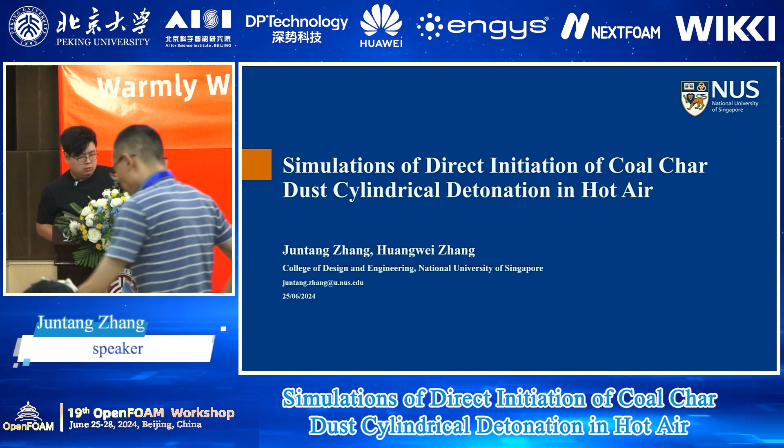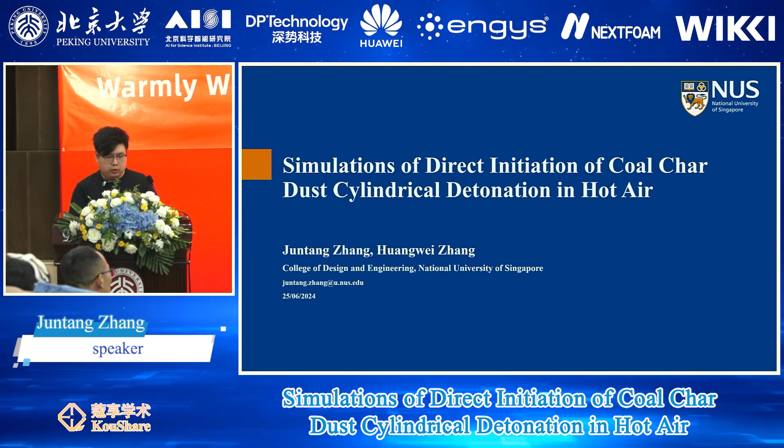The topic for my report is simulation of direct initiation of coal char dust cylindrical detonation in hot air. The content includes the research background, the mathematical model, results and discussion, and finally the conclusion. The first part is the research background.

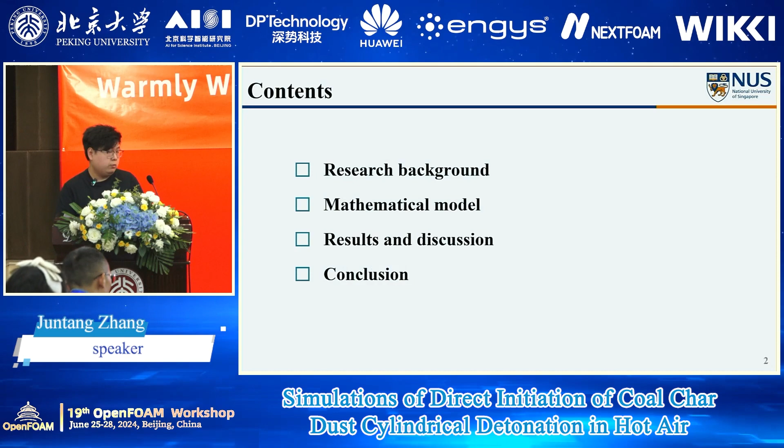The incorporation of coal char dust into the propulsion system has attracted a lot of attention, such as in rotating detonation engines (RDEs). The addition of coal char dust significantly enhances the fuel detonability and propulsion pressures, thus facilitating detonative combustion in the propulsion system.

Moreover, coal char dust has a high energy density. It's easier to store and presents almost no corrosive or cryogenic problems.

Except for the application in the propulsion system, the safety hazard corresponding to coal mining explosions also needs to be paid attention to. Coal particle explosions generate flames, shock waves, toxic gases, and high temperature, high pressure environments, posing serious threats to personnel and equipment safety. Therefore, to better control and prevent coal dust combustion, explosion, and detonation, we must study key mechanisms like flame propagation and detonation wave evolution.

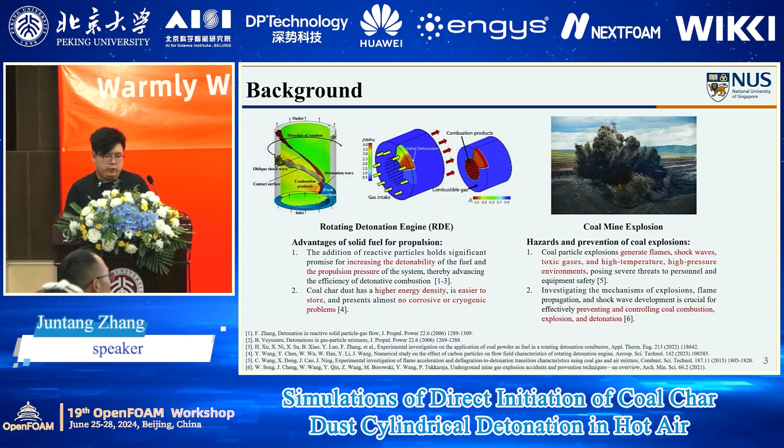However, there are relatively few studies on the direct detonation of coal char dust. In experiments, the peak value at monitoring points 1-8 proved the existence of coal particle detonation. Through multi-dimensional research under two different diameters, the pressure can reach 40 and 46 times the initial pressure, and the pressure peak is very stable, proving the occurrence of stable detonation conditions.

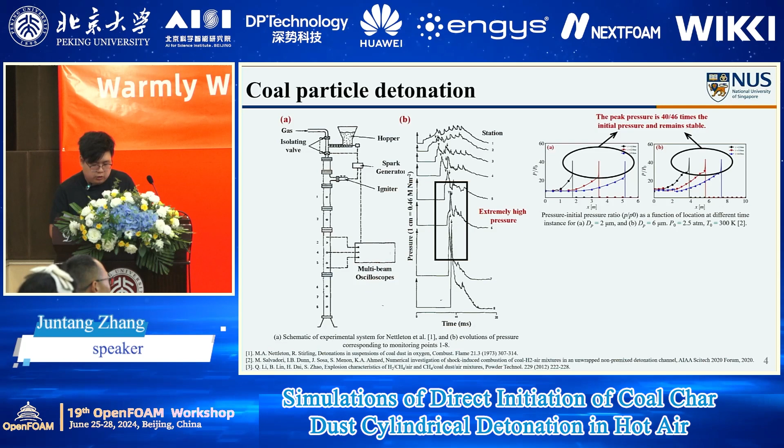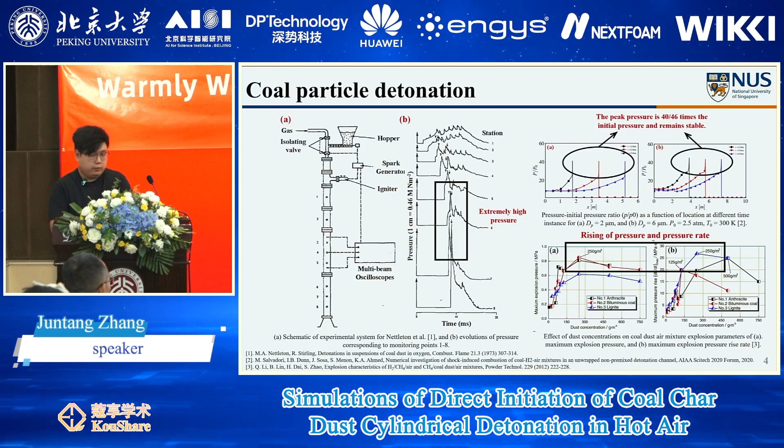Moreover, the addition of coal particles will increase the explosion pressure and the pressure growth rate. However, these works did not conduct detailed studies on the evolution process of coal char particle detonation and propagation.

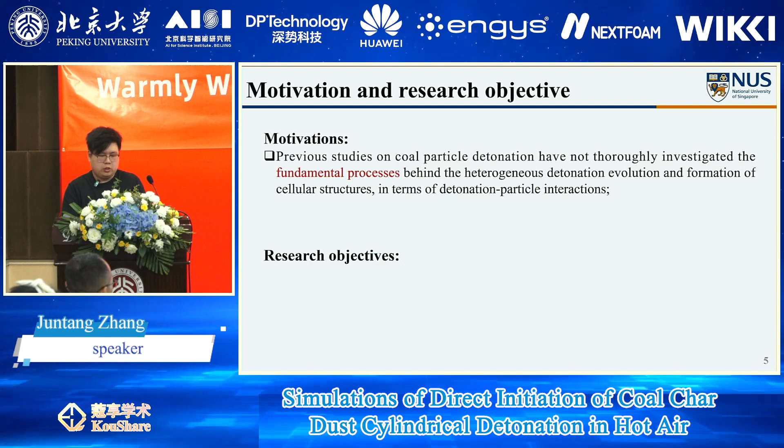Based on previous research and real-world observations, I will outline the motivation and research objectives. First, previous studies on coal particle detonation have not thoroughly investigated the fundamental process underlying the evolution and formation of the cellular structure. Besides, research on coal char particle detonation ignores the effects of global particle concentrations.

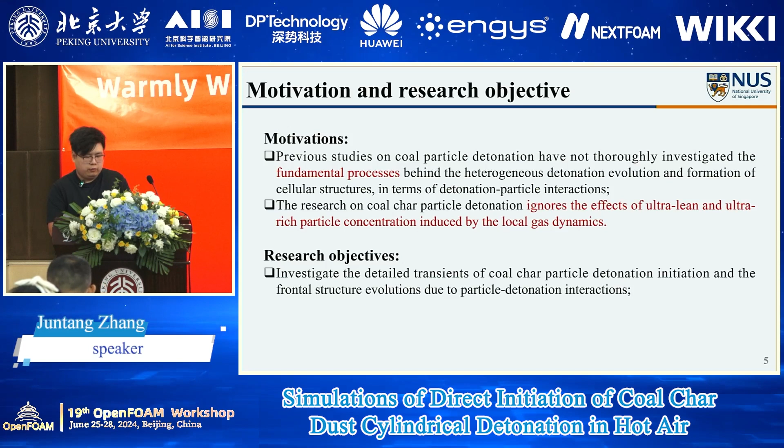Therefore, corresponding to the motivation, we need to study the detailed transients of coal char particle detonation initiation and the evolution of the frontal structure due to particle detonation interactions. Also, we should explore the development and characteristics of quasi-detonation waves with excessive coal char particles.

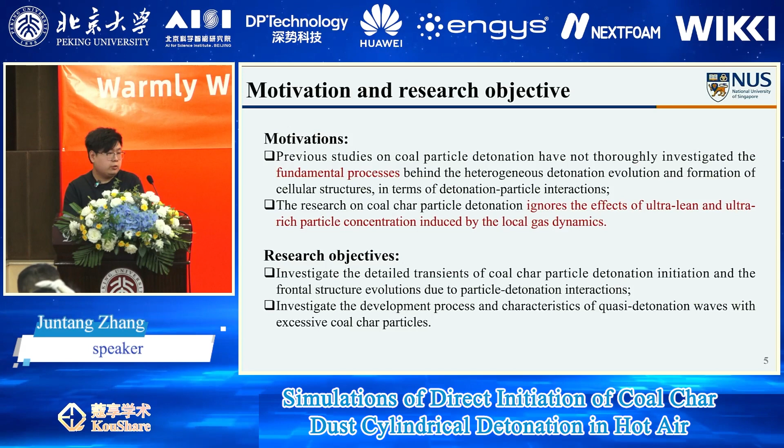Next, I will introduce the mathematical model for the whole simulation. The numerical simulation is completed by an OpenFOAM-based solver, using the Eulerian-Lagrangian method. The reference shown here demonstrates the effectiveness of the solver. The slide also shows the governing equations for the gas and solid phases, the particle surface reaction formula, and the interface source terms. The continuous phase is calculated with the Eulerian method, while the particle phase equations are solved with the Lagrangian method.

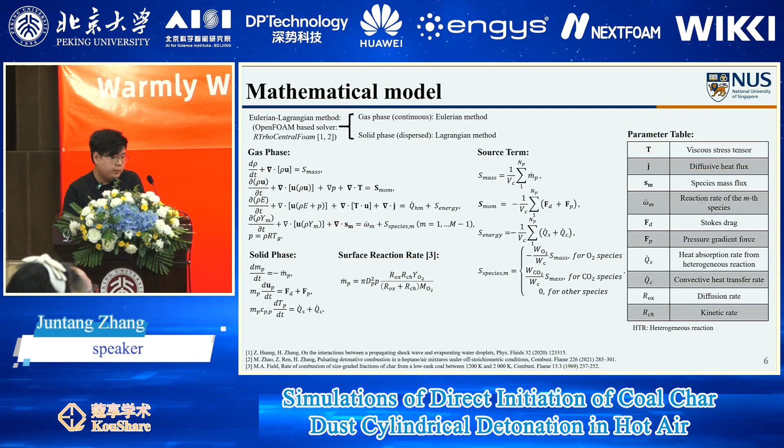Corresponding to the simplification process, we need to further simplify the governing equations. First, we ignore particle collisions in the dilute flows. Additionally, a low Biot number indicates uniform temperature inside the particles. Besides, compared to the inertial force from shock waves, the gravity of the particle is too weak to consider.

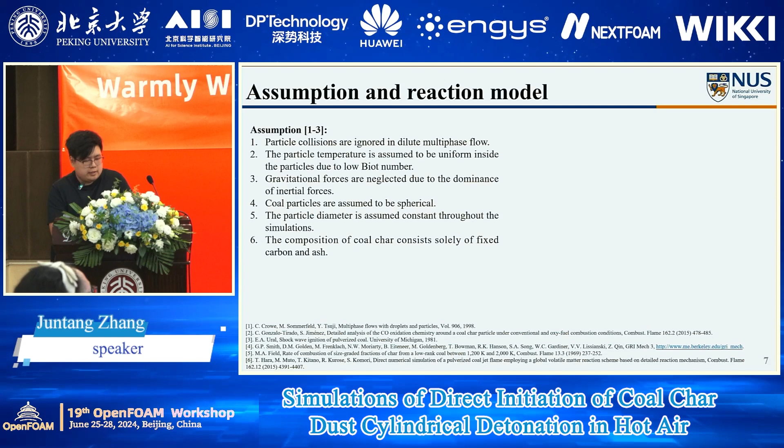We also assume that the coal particles are spherical, and given the faster propagation speed of the wavefront and the longer relaxation times of particle reactions, we can ignore the effect of particle volume variations in the wavefront and assume constant particle diameters throughout all simulations. In analyzing the coal char particles, we focus on the fixed carbon and ash only, ignoring other components like the volatiles. Here are all the assumptions.

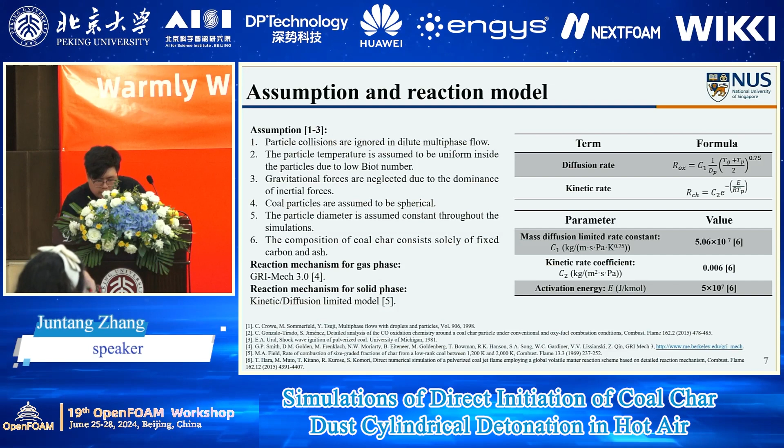In the computations, although there is no gas phase viscosity, the gas phase reactions are still important. For the gas phase reactions, we utilize GRI-Mech 3.0 to simulate the gas reactions, and the kinetic diffusion-limited model is applied for the particle surface reactions. This formula and the parameters are displayed in the table here.

Here we make model validations for our simulations. We utilized a 6.75 one-dimensional domain to mimic the referenced experiment, to validate our model and our parameters. The initiation radius of the blast wave is set at 0.31 meters, shown here as the red parts, where the gas temperature T, pressure P, and the speed of the blast wave all satisfy the Taylor-von Neumann-Sedov blast wave solution.

The coal char particles are uniformly distributed beyond the blast wave, with the initial parameters detailed in the table.

We can see the black dots. Here we introduce a concept of a parcel, wherein it's assumed that all particles within the same parcel share the identical properties, such as the temperature and velocity, to simplify the simulations. Among them, the parcel resolutions, as shown in the table, represent the spacing between the parcels.

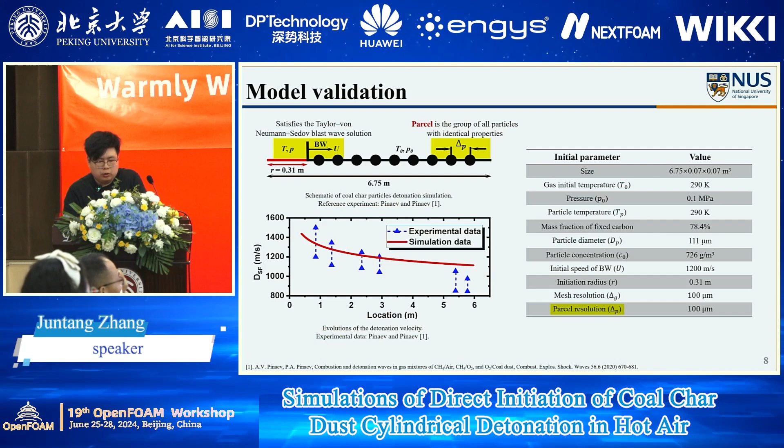We can see the figure. The results illustrated in this figure demonstrate that the model can reasonably and quantitatively predict the detonation velocity of the coal char particles. And now I would like to introduce the schematic of our detonation simulation.

The simulation domain measures 0.2 meters in both length and width, which is filled with air. We initialized a cylindrical blast wave at the red spot to ignite the detonation wave. The particle parcels are uniformly arranged outside the blast wave, and the concentration of these parcels ranges from 12 to 1,240 grams per cubic meter, corresponding to a particle equivalence ratio from 0.2 to 20.

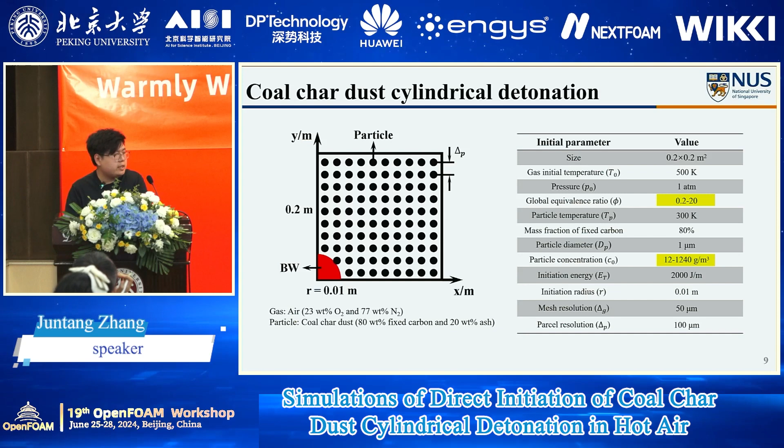Additional parameters are detailed in the table. So here we must focus on the 20 equivalence ratio. It's a very high equivalence ratio because we found that the concentration effect has a very significant effect on the detonation propagation. And here I would like to discuss the sensitivity analysis of the mesh.

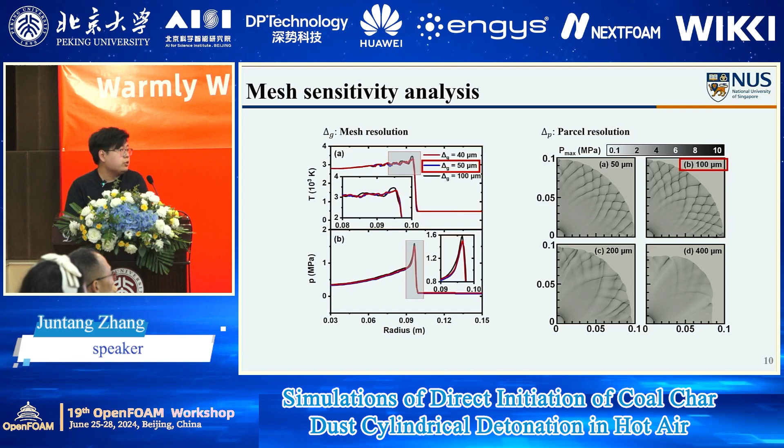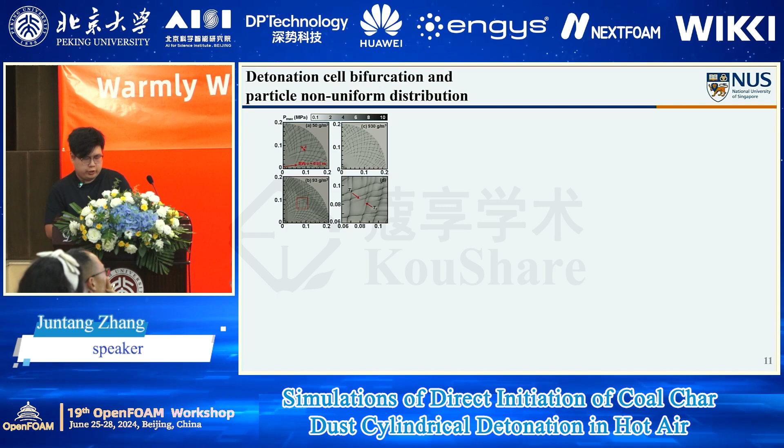Okay, and the coal detonation leads to the cell bifurcation driven by the solid particles. We began to examine the peak pressure trajectories across the three particle concentrations. In all cases, the overdriven detonation occurs at the early stages.

Beyond a critical radius, frontal instability starts, marked by the formation of clear peak pressure traces. Additionally, with a particle concentration of 93 grams per cubic meter, the cell becomes finer than in figure A at 50.

Because the sufficient heterogeneous reaction energy release stabilizes the detonation. However, at a particle concentration of 930 grams per cubic meter, the cellular structure becomes less distinct due to the excessive particles absorbing more energy from the detonation waves.

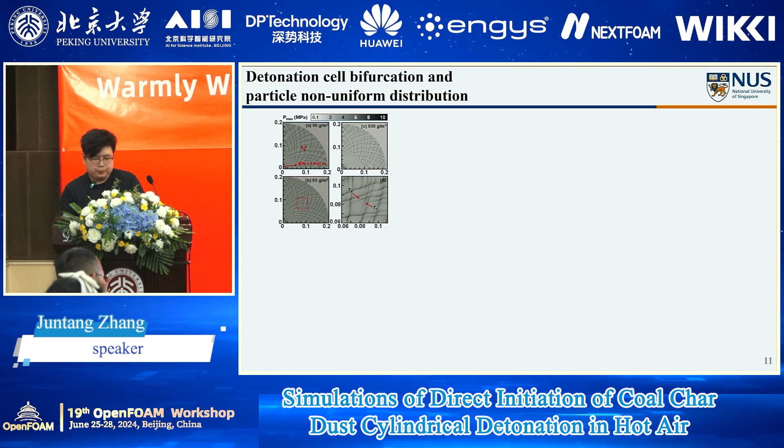And moreover, the detonation cellular bifurcation happens when the frontier radius is large, resulting in the formation of secondary cells and transverse waves from the triple points. This can be observed in the enlargement where the trajectories T1 and T2 gradually darken. The evolution of the triple point is displayed here.

And here we provide a GIF to show the evolution of the wrinkles and the collisions. The profile indicates that the particle aggregation and the surface reactions promote new transverse wave generations.

And this GIF also shows the evolution. The GIF also shows the evolution of the wrinkles and the collisions. And here we just provide the particle aggregation and the sparse areas.

Using the enlargement as an example, the two shear layers, S1 and S2, extend from the upper and lower triple points and behind the Mach stems. Specifically, sparse particle regions are filled with vortices from the transverse layers, which displace the particles from the original positions.

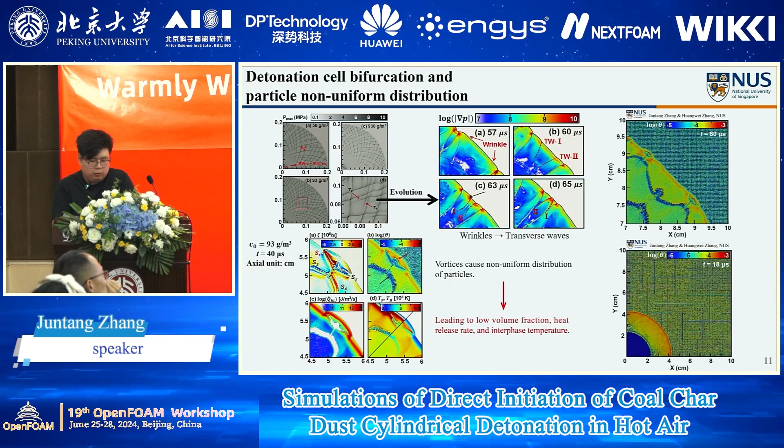These regions are characterized by low heat release rate, indicating relatively low local particle burning intensities and resulting in lower particle and gas temperatures.

Here we also provide an evolution GIF of the continuous layer sparse particle regions due to the variations within and between the Mach stems. And here we can see the evolutions of the sparseness regions and aggregation regions.

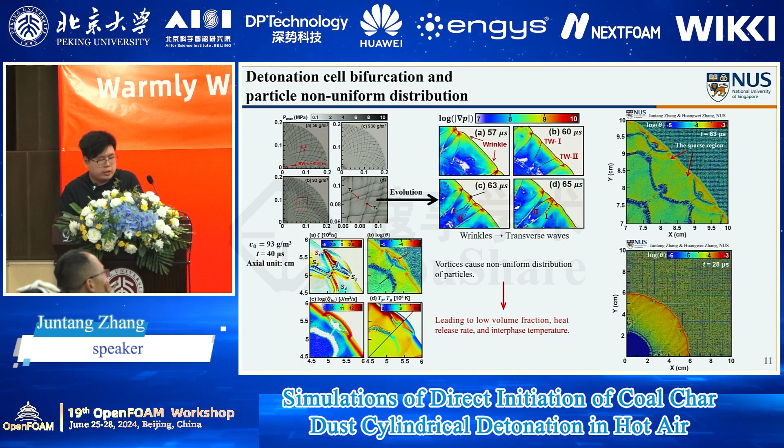Okay, and here in this article, we introduce the dimensionless parameter ξ, representing the mass ratio of the coal to the oxygen. To demonstrate the variations in the average cell size and the shock wavefront velocity, the ξ is related to the particle concentrations.

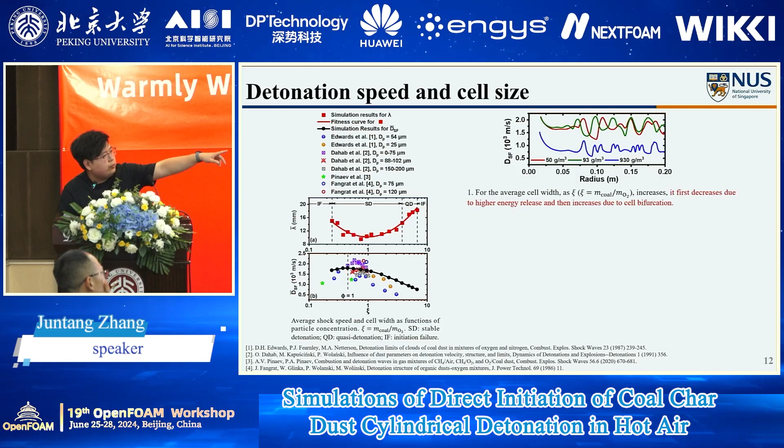So here for the first figure, the left figure A, the red line, we can see initially the average cell size decreases, indicating that more coal leads to a greater energy release and a smaller cell size. However, subsequent increases occur due to the cell bifurcation.

As the ξ increases, the average shock speed of the stable cellular detonation initially rises and then decreases, aligning with various experimental results.

From the ξ and the corresponding ratios between the particle concentrations, we can also categorize the detonation types based on ξ.

We will explain the specific reason for this classification later, such as the stable detonation or the quasi-detonation cases. Regarding the detonation speed under different concentrations from the figure on top, we can see the shock speed decrease rapidly beyond the initial blast wave locations to exit from the overdriving conditions, marked by the initiation of speed oscillations due to the multi-headed front.

In the quasi-detonation cases, we can see the blue lines. Here, the shock speed is about 48% lower than in the other two cases.

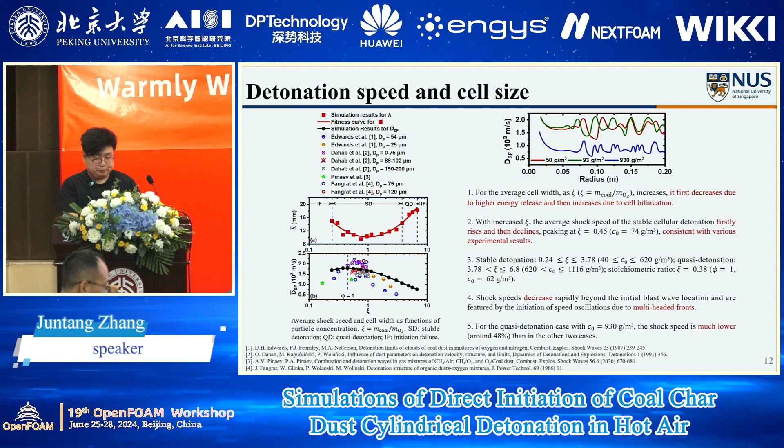In the previous pages, we distinguished the concentration ranges of the stable detonation and the quasi-detonations. Here we make comparisons. We can find that...

The phi here, and the phi at the bottom, is the global equivalence ratio. We can find that the non-uniform distribution of the particles occurs behind the wavefront. Besides, when the concentration is 93 grams per cubic meter, the gas and particle temperature and heat release rates in the sparse particle area are relatively low, while the mass fraction of oxygen is high. However, when the concentration is 930, the opposite conclusion is obtained.

When the concentration is 93, the subsonic region, as we can see in figure F in both figures, is continuous, while in the quasi-detonation conditions at 930, the subsonic region is discrete.

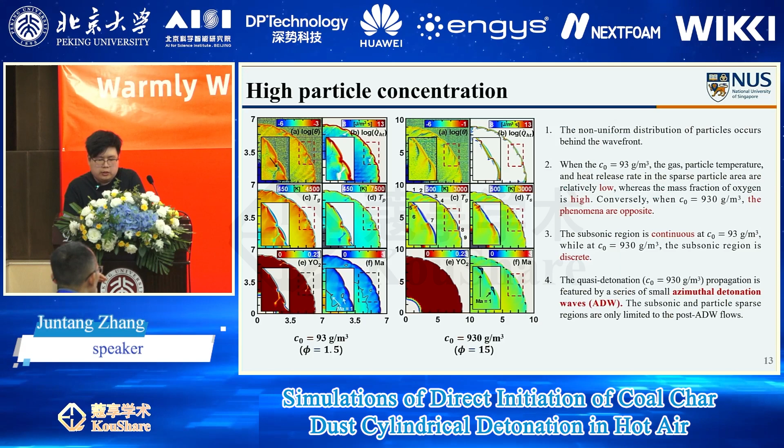Moreover, the quasi-detonation propagation is featured by a series of small azimuthal detonation waves. We can call it the ADW, namely from 9 to 8. We'll make an enlargement here.

Ahead of the individual ADWs, a narrow induction zone can be observed, filled with shocked but unburned particles. Above the domain diagonal, the ADW1-2-4 are propagating downward. Nevertheless, for 7, 8, 9, below the diagonal, they are moving upward. Collision of the ADWs are also observed.

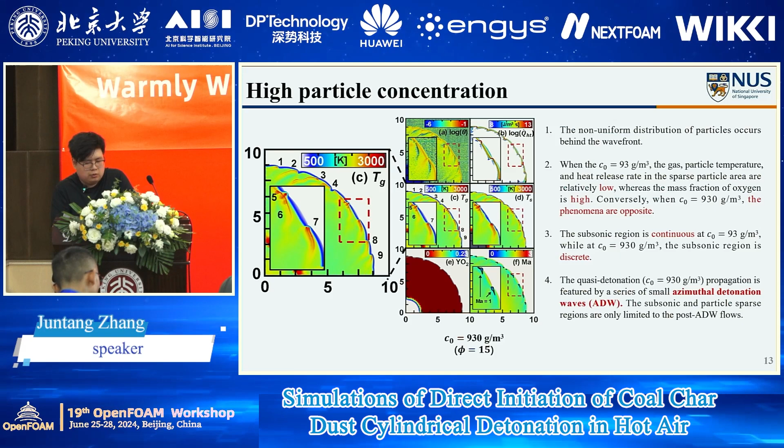So in the quasi-detonations, the subsonic and particle sparse regions are only limited to the post-azimuthal detonation wave flows. This is significantly different from the gas phase detonation.

In the detonation process, regardless of the initial configurations, whether in shock tubes or cylindrical conditions, or fuel types including gases, droplets, or particles, a consistent set of structural features such as the Mach stems and the incident waves play crucial roles in sustained detonation propagation. While the triple point has also been replaced by...

The interaction of ADWs in the quasi-detonation conditions. Besides, the temperature distributions behind the quasi-detonation waves are non-uniform, exhibiting a difference of nearly 2000 Kelvin, with notably higher temperature near the ADW. This phenomenon does not exist in the other detonation conditions.

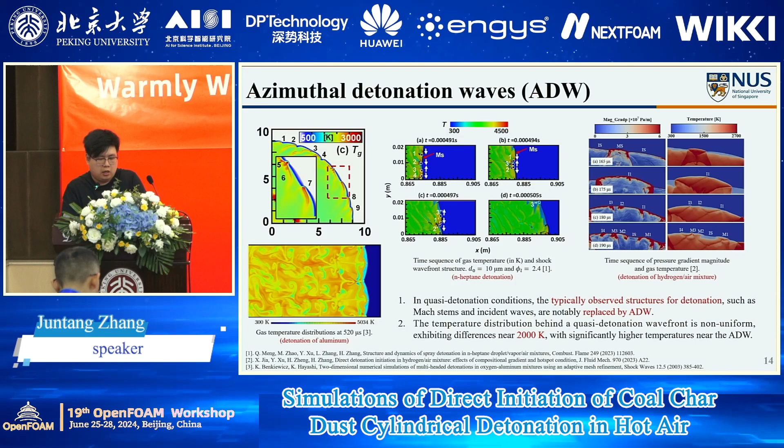Okay, and now we can make an overall comparison of the effect of particle concentration on the detonation wavefront.

First, by analyzing radial average parameters distributed at various particle concentrations, we found the induction distance for concentrations of 50, 93, and 930 grams per cubic meter are 2.5, 1.3, and 3.2 millimeters, respectively, indicating that the induction distance firstly decreases and then increases.

This suggests that most of the area behind the wavefront cannot enhance the leading shock waves or support the self-sustained detonation. Furthermore, the thickness of the shock zone at 93 is...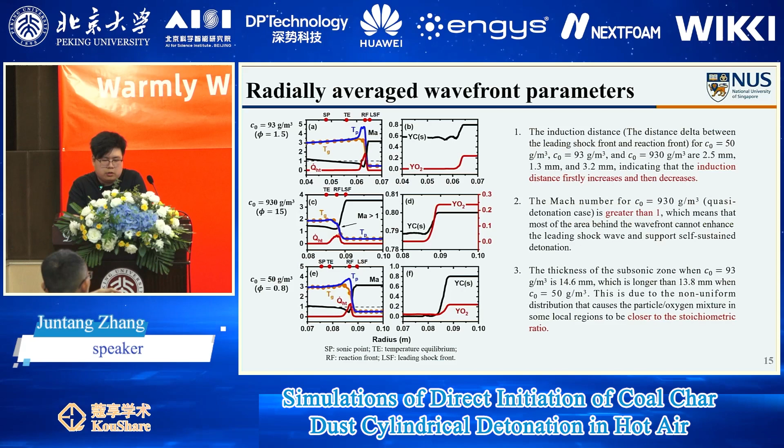14.6 millimeters, greater than the 13.8 millimeters observed at 50 grams per cubic meter. The difference is attributed to the non-uniform distributions that bring some local particle-oxygen mixture closer to the stoichiometric ratio.

Okay, now I would like to make a conclusion. Firstly, the gas-particle two-phase detonative combustion is simulated with the Eulerian-Lagrangian method developed from the OpenFOAM packages.

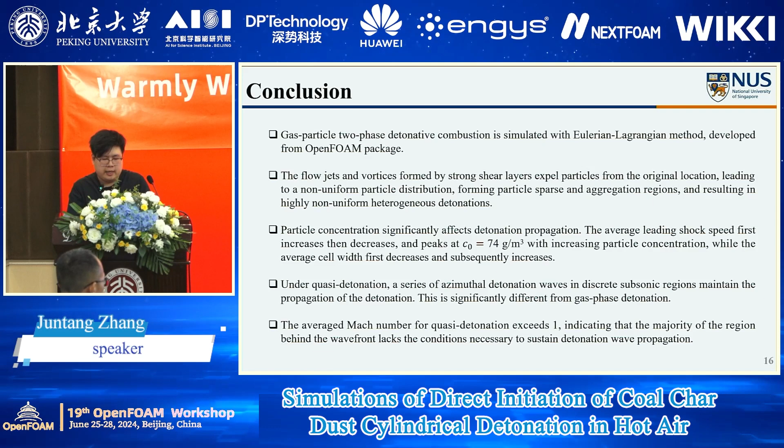Besides, the flow jets and vortices formed by strong shear layers expel particles from their original locations, leading to a non-uniform particle distribution, forming particle sparse and aggregation regions, and resulting in highly non-uniform heterogeneous detonation.

Thirdly, the particle concentration significantly affects the detonation propagation. The average leading shock speed first increases and then decreases with increased particle concentration, while the average cell width first...

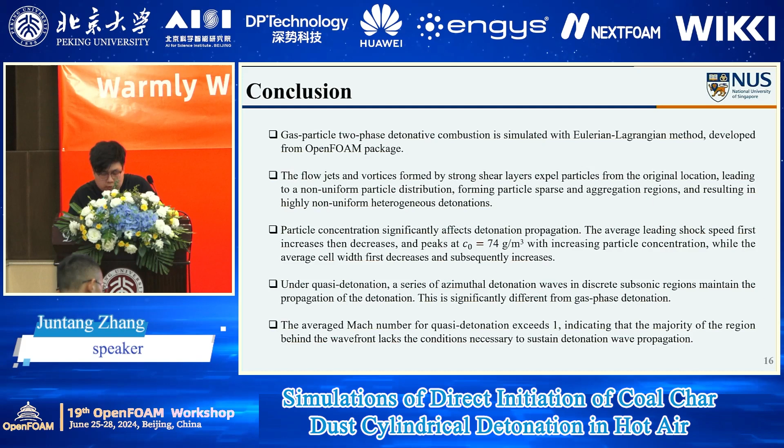decreases and subsequently increases. Fourth, under quasi-detonation, a series of azimuthal detonation waves in the discrete subsonic region maintains the propagation of the detonation. This is significantly different from the gas phase detonation.

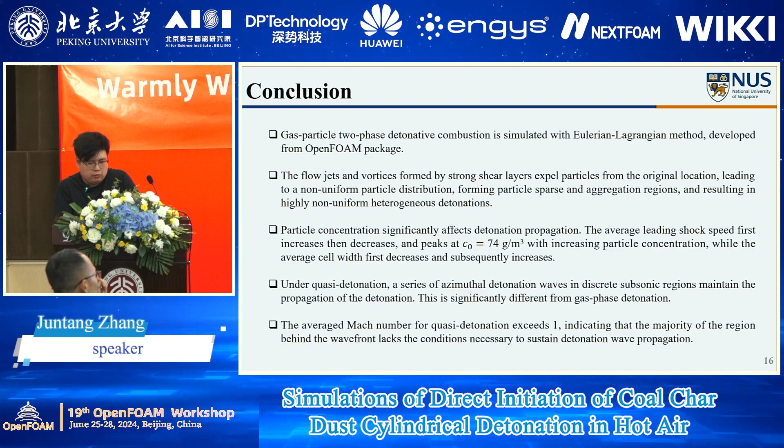At last, the average Mach number for the quasi-detonation exceeds 1, indicating that the majority of the region behind the wavefront lacks the conditions necessary to sustain detonation wave propagation. Okay, and thanks very much for your attention, this is my report.